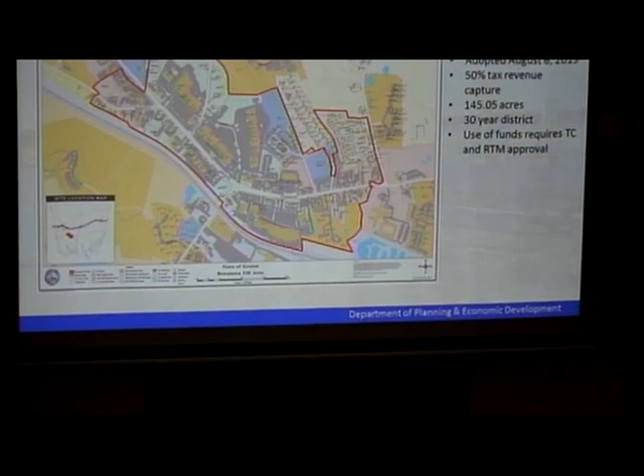So I just wanted to give a very brief overview of the Route 1 district plan that was adopted just last month, actually fully implemented in August. Again, the 50% recapture, it's just a little over 145 acres, and consistent with the policy both for the town and the city, we're looking at a 30-year TIF.

And in the town, any funding requirements for projects require approval of both the town council and the RTM. And again, just some of the general guidance and implementation of what we're looking for. These are guidelines that are within the TIF master plans themselves. If you look at both the city master plan as well as the town, we're looking for a lot of these same types of qualities. How can we improve the quality of life, sense of place, and get reinvestment back into these critical districts?

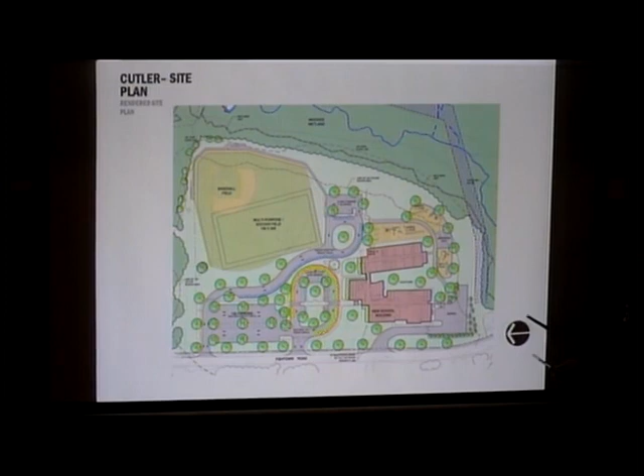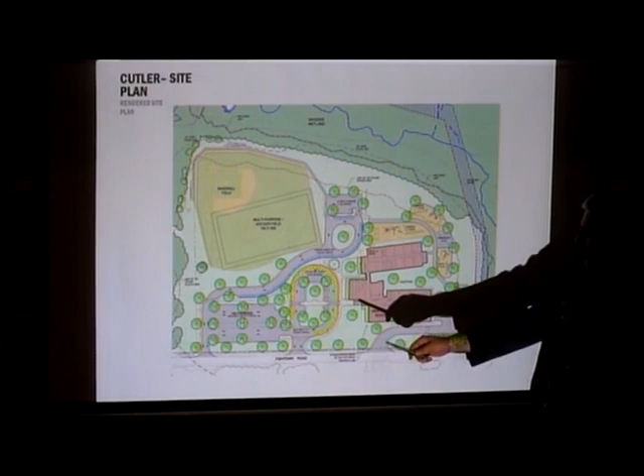Where Cutler is concerned, we're entering about midpoint of the site for our main entrance into the property, which will bring us into the bus loop. Students will enter at this area of the building near the administrative office. That'll also be the main visitor entrance to the school, where we'll have a security checkpoint at the front office area before anyone passes into other areas of the school.

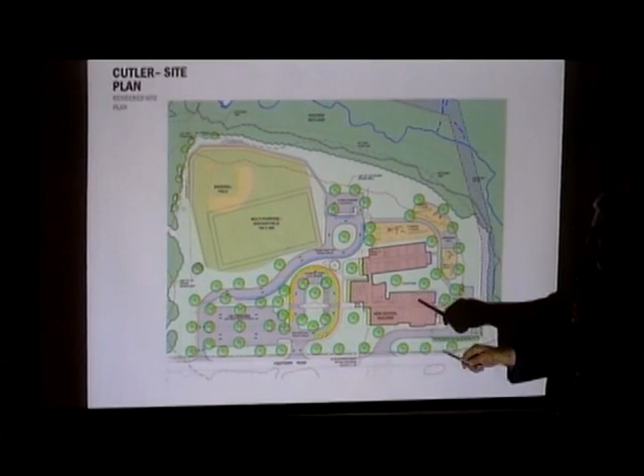The way the plans are broken up, the more public areas are concentrated, and then the academic areas are in a separate wing, which can be secured at night for segregating those academic spaces away from public traffic.

Specific to Cutler, as I mentioned, we have the bus loop. We'll have some visitor parking in this island in the center. And then the buses will pass back out onto Fishtown. Parent drop-off traffic will enter a separate entrance here and loop through.

We have this long drive which will allow curbside drop-off, and perhaps even more logistically challenging is afternoon pickup, where parents will be able to queue. Our goal is to get basically everybody off the road that we possibly can in order to queue up there.

There's also a separate parking area here for the pre-K and K parking, where parents walk their children into the schools and they're accepted by the teachers. They'll be able to approach this way through the walk here, and there will be a minor entrance here that will be used just for that pre-K population. Everyone else will be required to enter at the main area. So your parent drop-off and your pre-K traffic will come here.

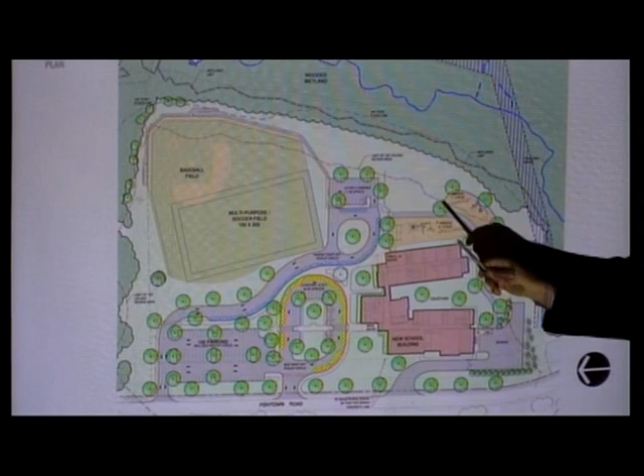As far as the site development is concerned, we're using pretty much every inch of the space. We were given an accommodation by the wetlands folks that any area within this dotted red line, the 100-foot upland review area for the wetlands, could be developed as long as we didn't expand the cleared portion of the site beyond what was already cleared. So we could do development such as the playscapes and ball fields within that 100-foot protected area. We've respected that existing clearing limit line, and as such we have what you see for available area for development.

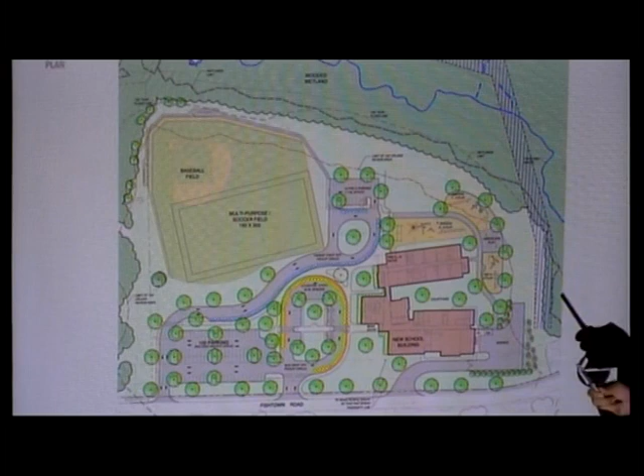We do actually have more developed area as far as hardscape than the existing building, and although that might sound like it's not ideal, it's actually functionally very good in that we're able to separate the bus and parent traffic and have them use two separate intersections to the main road, so we can keep those traffic flows as separated as possible and keep them safe.

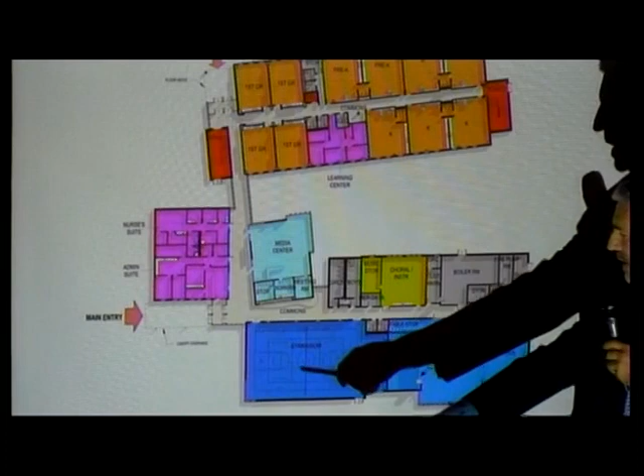As I mentioned, the big box spaces are located in the wing closest to the street: boiler and back of house spaces, music areas, gym, and the dining room or cafeteria with a performance area. This will be an at-floor-level performance area. We're not putting in a raised platform, which adds more flexibility instead of building a stage, the same technique we employed at the middle school. So if they need a raised area, they can use platform risers, but for accessibility and flexibility of use, if they need overflow for classroom space, it's all at one level. Then the kitchen and service area is off to the side.

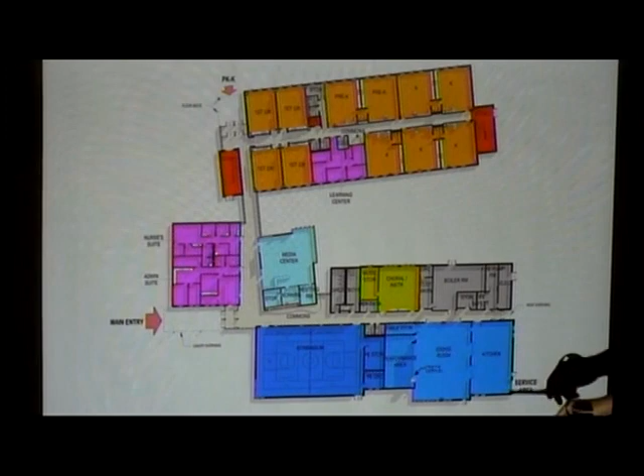The media center in both cases is central to the building. A wider circulation space called the Commons is provided with a little gathering bench. The main office and administrative nurses suite will be right at the entrance. A visitor comes to the building, they'll first get buzzed into this vestibule. These doors will continue to be locked. They come in and sign in at the office and then are allowed passage into the building itself.

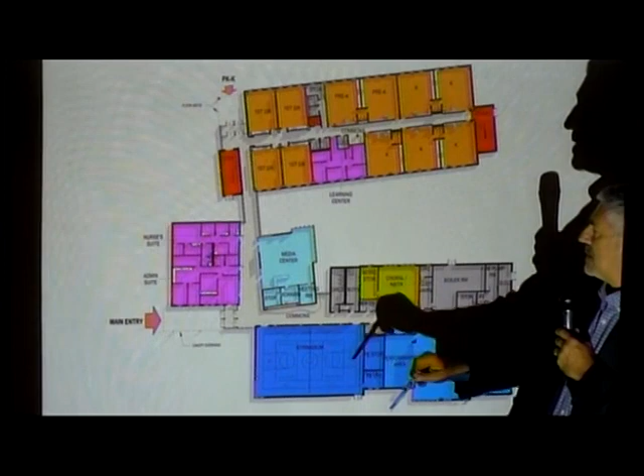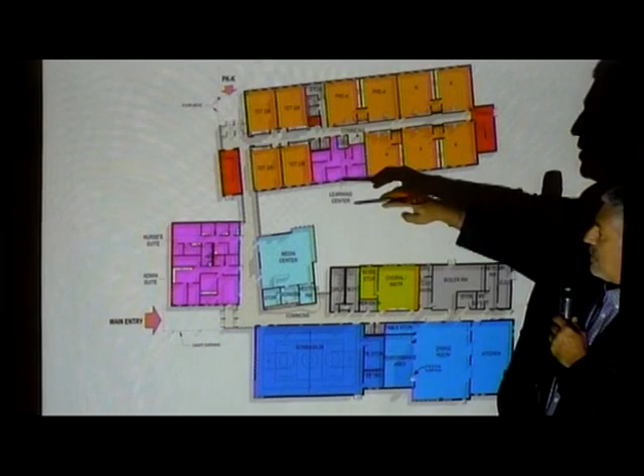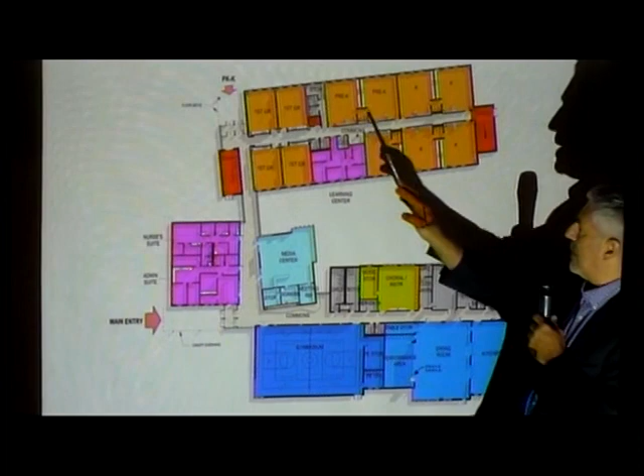At Cutler we have an essentially flat site, so you'll have an academic wing that appears three stories, but we're locating that as far from the street as possible so it'll be less imposing to the neighborhood. First grade, pre-K, and kindergarten will be on the ground floor level, then we proceed upstairs to two more academic floors. Looking from basically the parking bus loop area at the building, you can see the massing of the big box spaces is large, but still not as large as if we had put the academic three-story at the street. So our setbacks are at or beyond the minimums required by zoning, and we're trying to keep the highest portions as far away as possible.

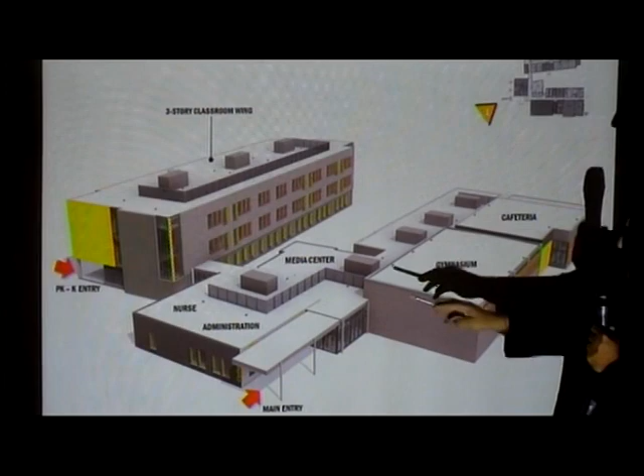There are roof areas that have the potential for solar installations, and that's being researched on all three schools. Any mechanical equipment on the roof that could be visible from the street will be provided with screening.

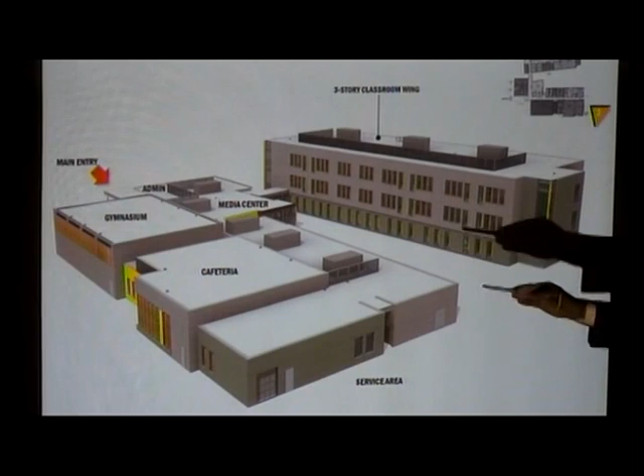Here's a look from the opposite corner from the service area as you come around the curve on Fishtown. You can see that there's not an official courtyard, but there is daylight between the wings so that these classroom spaces will have full access to daylight.

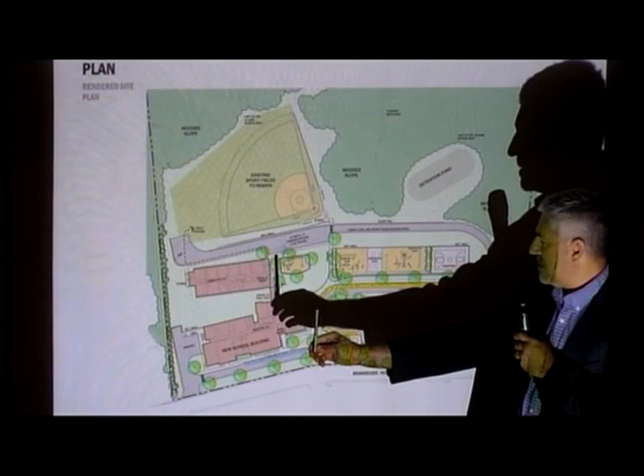At Westside we have an existing building that is not only in this area of the site, but actually approaches and nearly touches this wing of the new building. So our plan for construction here will be to start on the academic building, put in the foundations and begin raising the steel there first, then come back through the public wing and work this way. Our expectation is that we will be out of the school season by the time we get to constructing the office block.

Another obvious question will be, what do we do about parking? There's some parking in the front of Westside, but there's also a large lot in this area. The construction manager, O&G Industries, has worked out a logistics plan that says for those early stages when we're doing predominantly work back here, there will be a small reduction in teacher parking of, I believe, something in the neighborhood of 14 to 16 spaces. Depending on how the winter weather treats us and how early our spring actually comes to Groton next year, we'll see how much progress we can make until school is out.

There's another potential increment to take another slug of that parking and occupy it for construction activities. In the event that's required, there's a memorandum of understanding being reviewed by the attorneys right now between the town and Pfizer to use their visitors lot as overflow parking. If that becomes necessary, there will be a shuttle bus that runs back and forth for staff purposes. We would still keep visitor traffic on site.

Again, in the interest of safety and circulation, we've created 2 separate entry points for parents and buses. The only dual use here is that during drop-off, pre-K and kindergarten parents will drive around to the back, and there's a separate lot, similar to Cutler, a dedicated lot for them to park and walk their students into the academic wing. So those will be the only cars that need to drive through that loop, which is the same entry that the buses will use, entry and exit point.

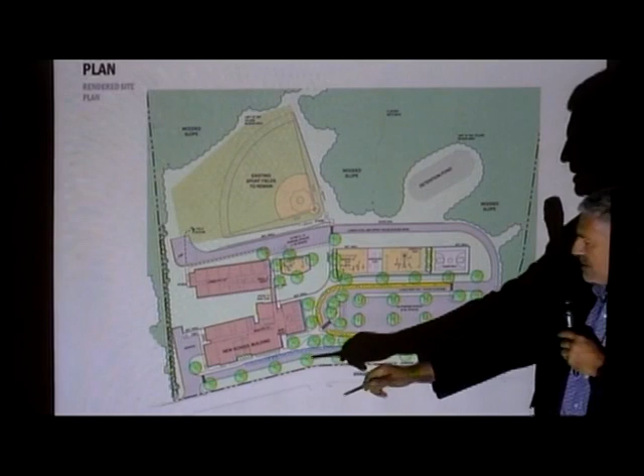As you're aware, we have a significant grade change from street level to playing field level. That will cause the academic building to seem much shorter than it really is. In fact, there's about a 6-foot change between the roadway here and the driveway right at the building. So even the big box spaces will be reduced in height effectively because of the slope of the land.

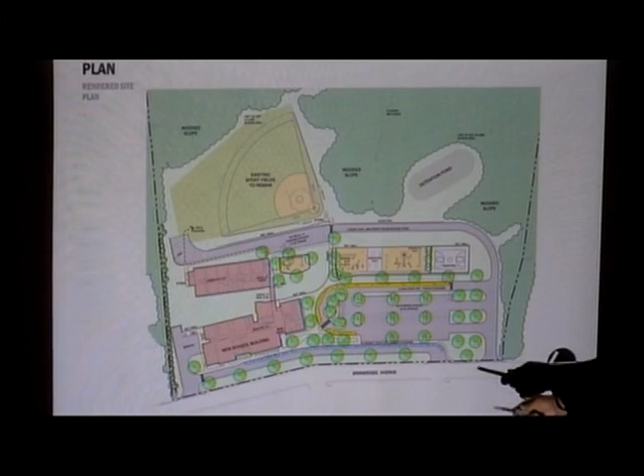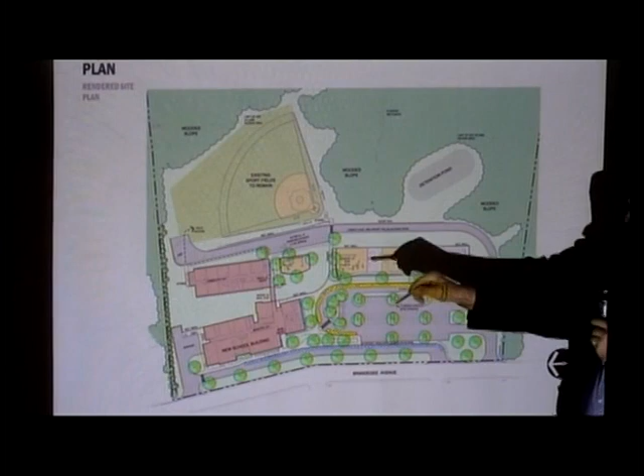By flattening things out in order to build, we've got a considerable amount of earth to move, and it's been calculated that it's obviously more effective if we can move the soil on site rather than carting it away. So we will be depositing that soil here in the field area, bringing that elevation up, which will effectively reduce the distance vertically that you travel from this area down to the fields, which is beneficial for our handicap circulation, et cetera. So we're saving money and making it more convenient at the same time.

The only area of new clearing that will happen on this site is in this area. This dotted line curving around is our 200-foot upland review from the wetland area. And we have just a detention pond to take our stormwater that will be intruding into that wooded area. Might be a little trimming along the edges, but generally speaking, we're respecting the existing boundaries to the greatest extent.

Similar in floor plan layout, we have the administrative block. We also have a health clinic in this area, and our faculty dining is located in this block. So this area is a little larger in square footage than what we saw at Cutler.

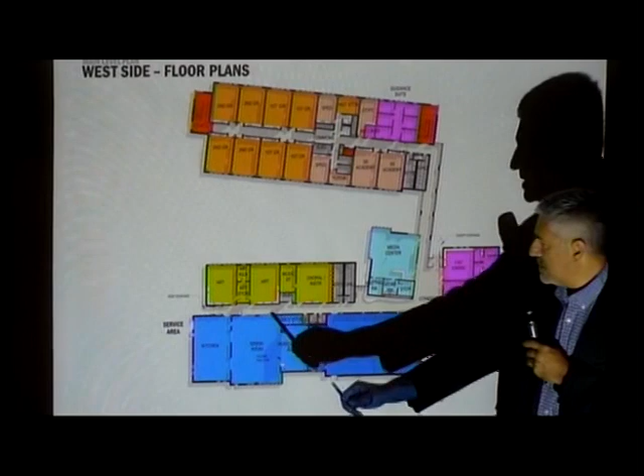Similar idea of visitor entry: come into a locked vestibule, sign in at the office, and then be given access into the building proper. The big box spaces, art and music on the first floor here, media center central, with again that commons and multi-use seating area, circulation area here.

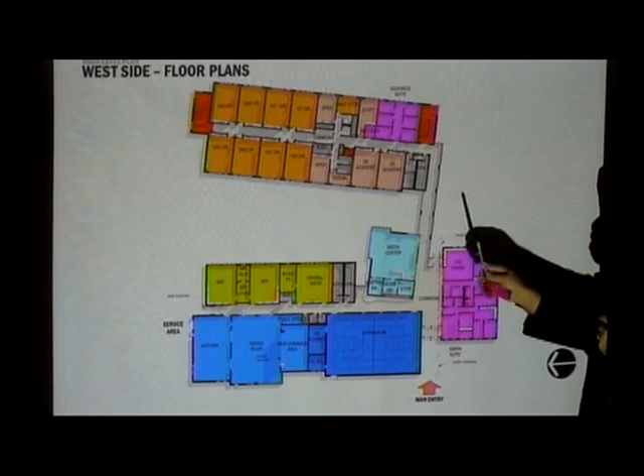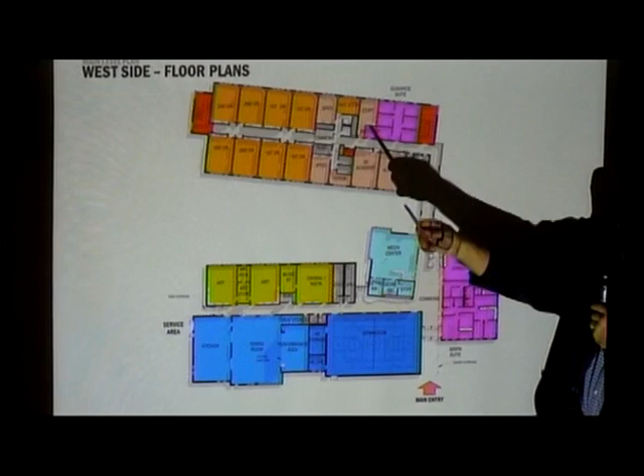Due to the grade ranges and the need to have certain age students at grade, some of those students, the first graders, will have, since we effectively have 2 grade levels, one at the field level, one at the main entry level, we can accommodate the need for an at-grade exit through here, with obviously stairs and emergency escapes at both ends. Again, we'll have one level below this, which is the pre-K and some support space, and then up on the topmost layer of the academic building, the grades above second grade, so 3rd, 4th, and 5th, will all be concentrated upstairs. There are special ed and tutor spaces and other resources interspersed within all 3 of the academic levels in order to reduce student circulation to get back and forth to their support services.

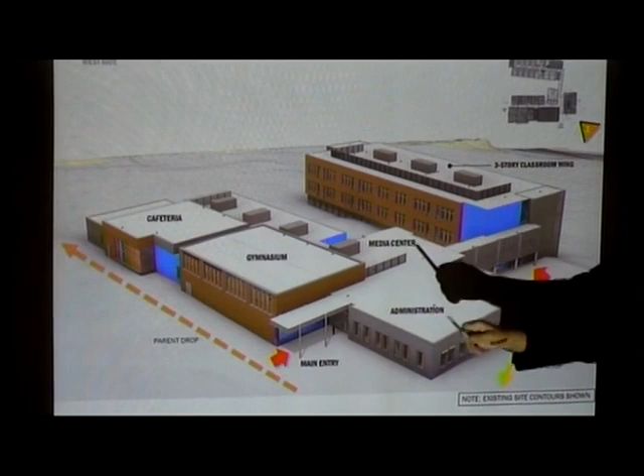This doesn't really depict the grade changes as effectively as we'd like to illustrate, but you can see this level of classrooms is below the office and entry level, giving the appearance from the street of only a 2-story building. Again, mechanical equipment is nestled behind the big box spaces to the extent we can, screening them from the street with rooftop screening. There are still areas on these roofs that could be used for solar installations.

I'd like to stress that the designs were developed with the architects keeping in mind that people actually have to teach in these schools. So there were an awful lot of administrators, teachers, special ed people and others who sat and put together all of the square footage, figured out what they were going to need, and how the adjacencies were going to work together. This wasn't designed just by a bunch of architects. Many people who are going to be in these schools have had a direct hand in defining how they're going to work.

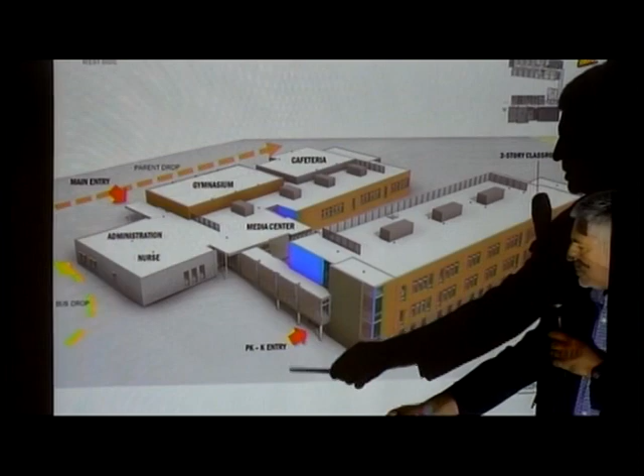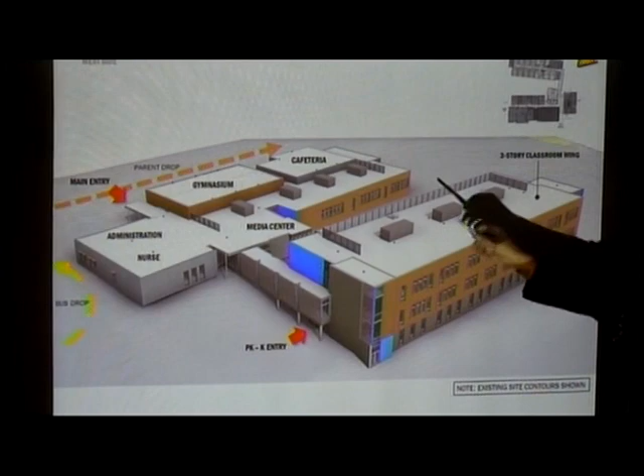Here's a view coming from the field area. You see the lower entry, the pre-K and K entry, is below. This is actually more of a bridge than a corridor, as the grade drops down and exposes that lower level. What you don't see is the dedicated parking area for that drop-off function. But again, similar to what we saw at Cutler, the 3 stories are married to the high 1-story spaces that'll be closer to the street.

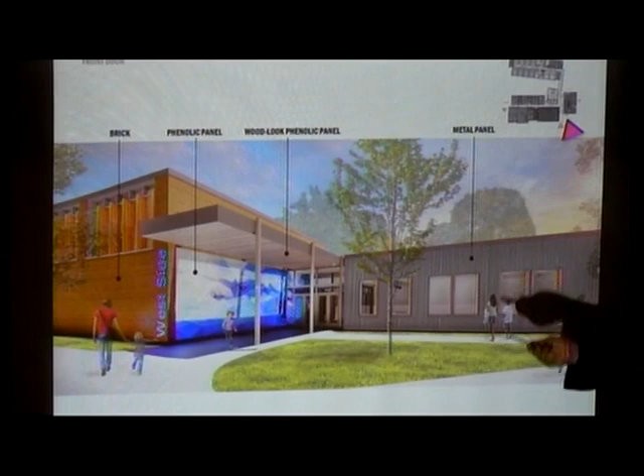Here are some images that are similar for both, though not the same, but it would be kind of redundant to show you almost identical versions of each. The architects are looking at a variety of exterior finishes, including brick, some composite materials that would give a smoother texture, and some metal panel of some sort. We do have that type of mix of materials on the middle school to change up the palette and add some interest to the building. Color schemes and whatnot are still being researched with the building committee, so this is all considered tentative. But there will be a variety of spaces.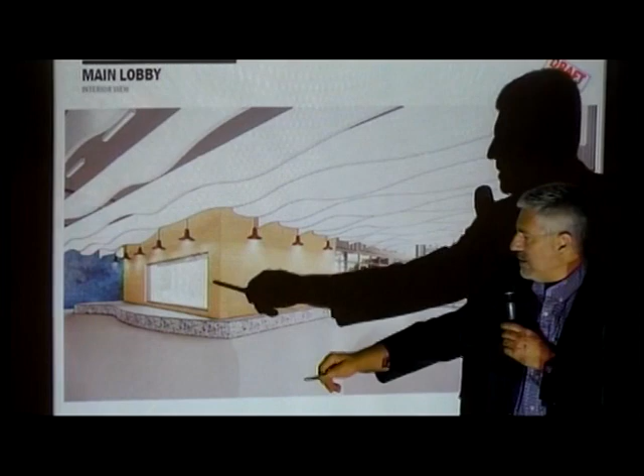As you see from the academic or administrative area, it's a 1-story space, as is the cafeteria and gym, but the scales are such that we don't need the space for the academics. So again, we try to step that scale of the building down to make it more human scale at the point of entrance. This is a typical main lobby, commons area. There will be some display areas provided, and a bench for gathering. This is across the hallway from the gymnasium. Here, the media center will be just down the hall from the main entrance, and these window walls represent the main office. This is at West Side, the exit that gets you down off to those playscapes that are at parking lot level.

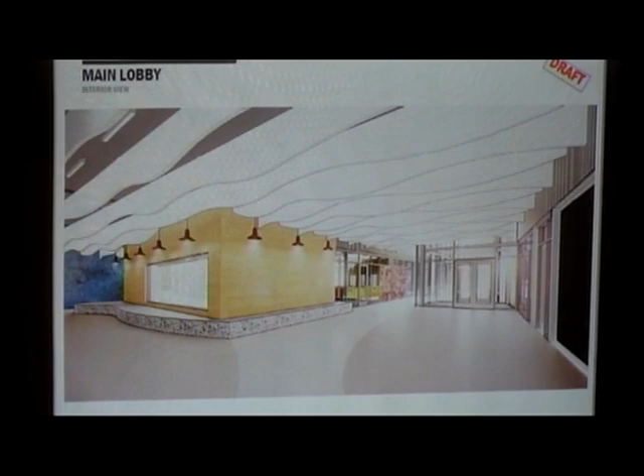Instead of a flat acoustical ceiling, it's open to the structure, but there are acoustical baffles hung, which will add some visual excitement to the ceiling without just being a sea of flat tile. But it will have acoustical properties. A similar type of material is being used in the media center, with different types of lighting.

Last week, at a special building committee meeting, the architects began discussing the palette of materials and themes, as far as colors that will differentiate the schools. As you saw on the floor plans, the schools are not identical, but they're equitable, and we'll try to keep similar qualities of materials while breaking up the color schemes and approaches so that each school has its own identity.

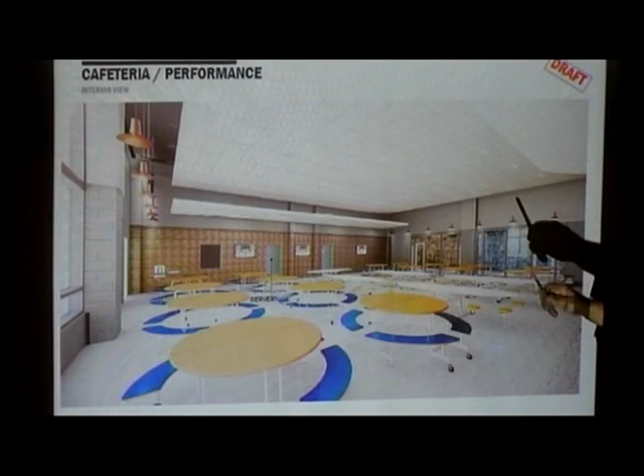One large area that will have the flatter ceiling is the cafeteria area. This is looking from the corner. There's that non-stage performance area that will be off to one side, so it really functions as a cafetorium. There will be chair and table storage off to the side so that the eating tables can be removed to allow an assembly or a performance to happen there. With a flatter ceiling that's held off the walls to float in the middle of the room, and an acoustic baffle at the rear near the servery, the architects are paying attention to the acoustics in that space to make it appropriate for both cafeteria use and performance.

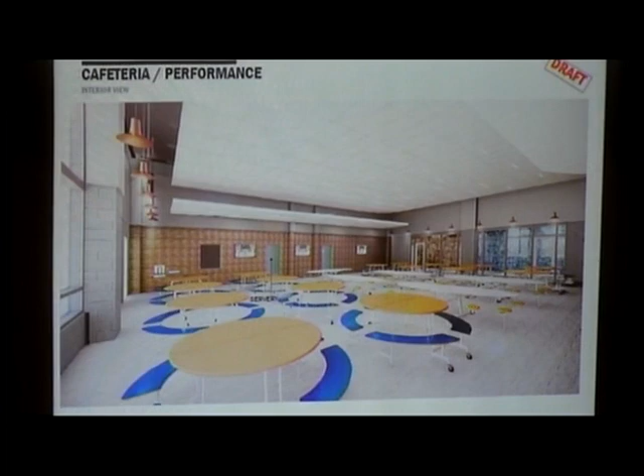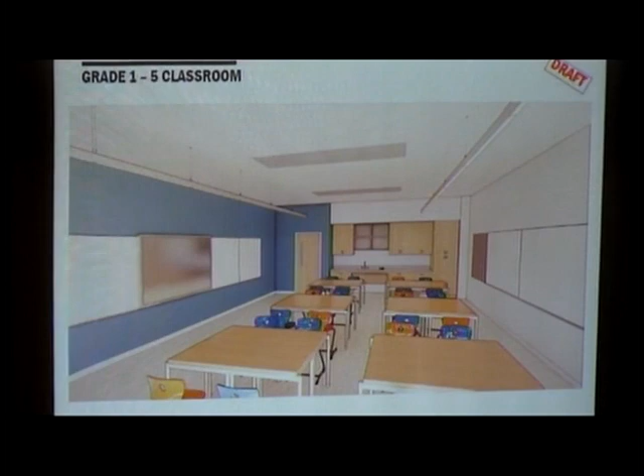Here's a comparison of the two schools, West Side versus Cutler. You can see many of the same types of spaces grouped in similar fashions. They are not directly mirror images of each other, but they are striving toward as much similarity from a functional standpoint as the sites would permit.

Are there any questions on the elementary school?

Could you go back to the illustration that shows the ground? Councilor Zeperi, can you see if that microphone is on, please? The light's on. It's red. Try this one. Lights on, but no results. Correct — they said that about me for a long time. We have Councilor Zeperi, and then Councilor Franco wishes to speak.

On the ground site where you show the three buildings, the classroom building is at a lower level, and there's a bridge going across — well, there's another one. The one thing I'm concerned about is that school building being on the lowest land level of the site. I'm concerned about surface water — will it all accumulate? Is that building going to actually be a lake?

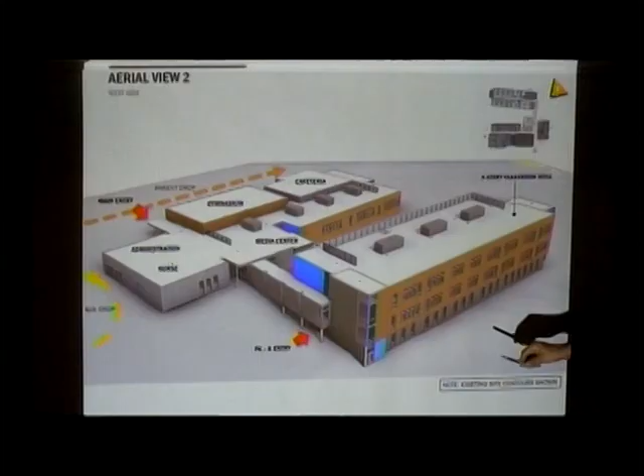The grade actually continues down towards the fields, and then past the fields goes down the hill into the wetland. So we are partly down the hill.

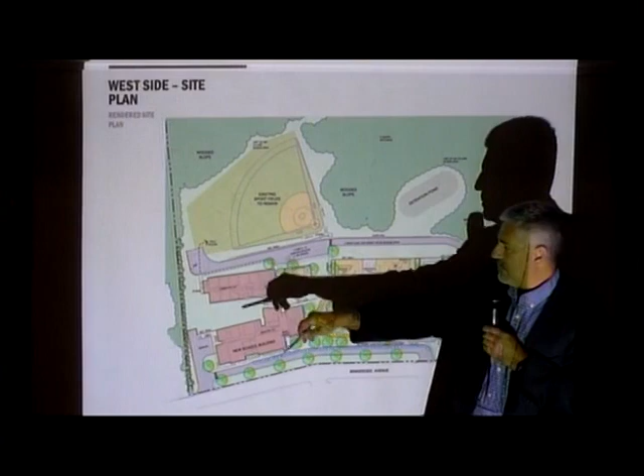I thought you had told us that you were raising the level of the field so it would be easier for people to get to. Yes, there is still a fairly significant grade change from this level down to the field, but now it's four feet less than it was before, once we take all our fill from this area and deposit it here.

Councilor Ortiz: Hi, I have two questions. On the slide with the classroom, where are the windows? Actually, the camera is in the window in this orientation.

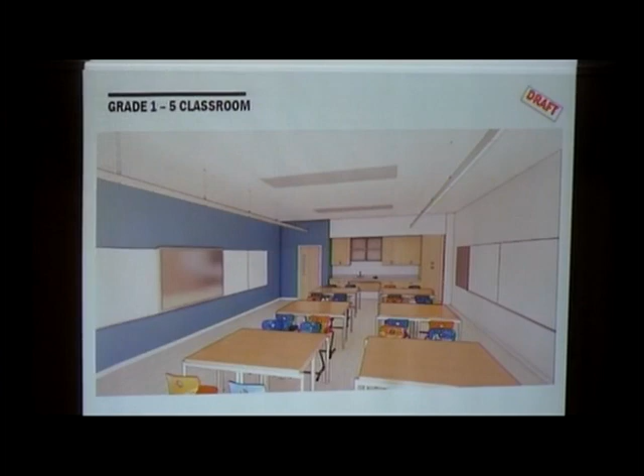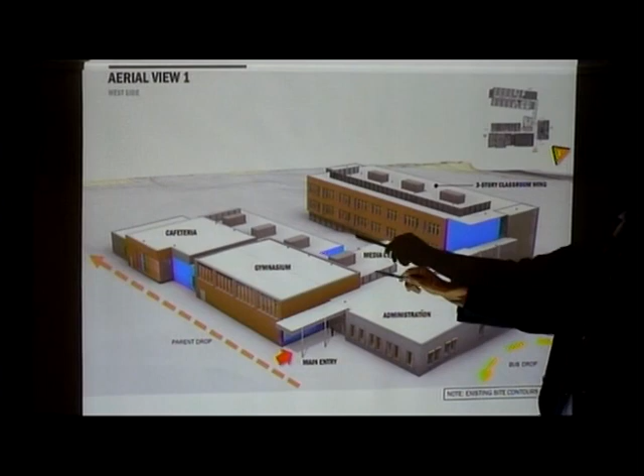Every classroom has both direct and indirect lighting, and if you look at the way the buildings have been stacked and organized, they've been designed specifically so that light reaches all of them — even the pre-K classrooms at the bottom will have daylight. This portion of the lower level at Westside is our support space, the boiler room, etc., hidden by the hill. Then as we get toward the more open area of the court between the wings, the grade drops sufficiently so that all the classrooms have daylight.

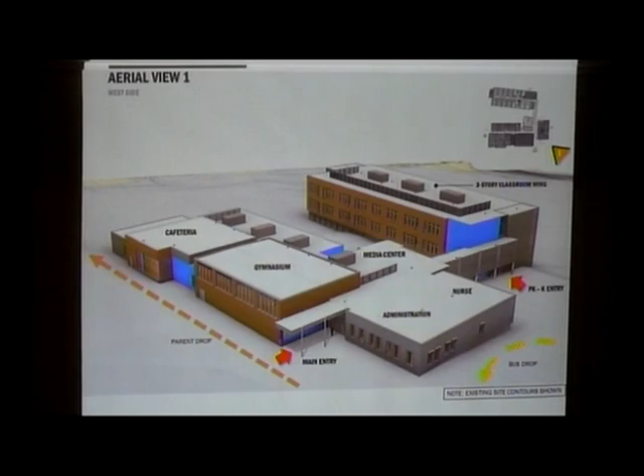Special ed rooms, classrooms — are you going to build to cater to special ed, physically and otherwise?

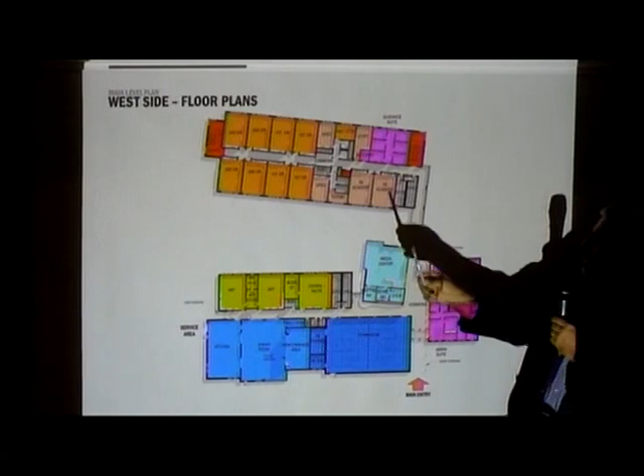The two schools have slightly different programs for special ed. They have different names and different functions, but the space allocation is very similar in terms of square footage. The academy spaces here at Westside support special ed plus special ed resource areas. This is just showing one floor, but there are other resources scattered throughout the building.

This was one of the things that was very carefully looked at — the special ed staff who actually teach and work with these students had input, and they let us know how much space they needed, who they had, and what kind of uses needed to be adjacent to each other. So you'll see there's the OT-PT space here that opens up into a commons.

And Jack can go further. And then tutoring spaces, again, the special ed resource rooms. And again, this is just represented one floor of Westside.

Thank you. You're welcome. Councilor Franco: I have a lot of questions. Is this on? Okay. So how many children will be in each school? That's up to the Board of Ed. What does that design hold?

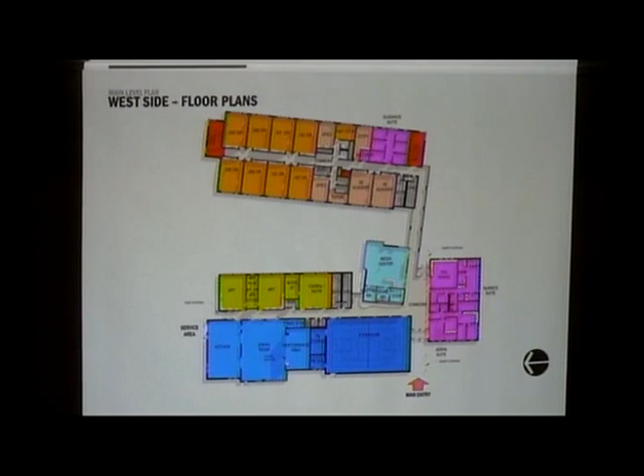The design capacity as requested when the town sought the grants was 604 students per building. Is there room for expansion if needed, if there was a big boom? There is room within the existing allocation of classrooms to accept more students in the existing footprint. And yes, given the constraints of the site, the possibilities for throwing an addition on have been discussed, although configuration-wise it would be a little difficult because of our constraints with the wetlands and setback lines. So there's a potential, but I can't say we're going to add a dozen classrooms to each. And that's on both buildings?

Yes, both. We've discussed that with the architects on both buildings. I can't say that we have a clear, put-them-here footprint determined, but we know that within the number of teaching spaces we have, and by allocating those spaces and perhaps adjusting the number of students per class, there is an opportunity to absorb a certain percentage of growth even within the existing footprint.

Okay, so these are renderings. How locked in are they? How locked in are these designs? The floor plans are essentially set. We are now in the process of creating construction documents. We've gone through schematic design and design development.

Those have been accepted by the building committee and reviewed by the board. It conforms with the ed specs and has received everyone's approval so we can proceed into the construction documents phase, which will wrap up this fall, but I believe the deadline is the 9th. Next week is our 50% point for checking the construction documents and sending them out to the estimators again. So CDs are just about halfway done at this point with a goal of wrapping up by November.

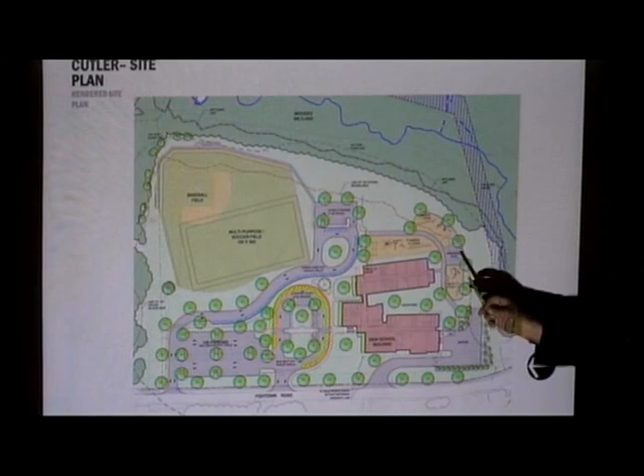So can you tell me what the outdoor athletic areas are? We have paved play, three age-appropriate playscapes located on the site, a multi-purpose field, and a baseball field that would be provided at Cutler. Is there a basketball court? There is not at this time, no.

So previously at Cutler there were six areas: a tennis court, a basketball court, a general field, a soccer field, a softball field, and a baseball field. So those were six areas for athletics. And what I'm seeing here basically comes down to about three areas. I'm wondering why we're losing so much, and then there's no ability to even expand the school if there's growth.

The projects are elementary schools, which have a much different program than the middle schools that have until now occupied the sites. With research, the middle schools did not have things such as the paved play and the playscapes, which you can see chew up fairly measurable square footage on site. We also have the balance with the state grant and the granting agency that is looking at what does an elementary school need, what does the ed spec request as far as features to support the elementary school. And beyond that, features, if we could fit them, would not be eligible for state reimbursement.

Due to the fact that we did not have separate traffic patterns for buses and parents, as I discussed earlier, we are actually creating more roadway surface in these layouts than we had previously, but it's being done for a programmatic function, which is to separate those traffic patterns. So that takes precedent - what are the features required to support an elementary function - and those became priorities. So if there was square footage available for something beyond what an elementary school requires, those would be features we'd essentially have to come back to the council about, to ask if we can spend money on features outside of the ed spec that are not education specific. So that was what has been driving each of these designs.

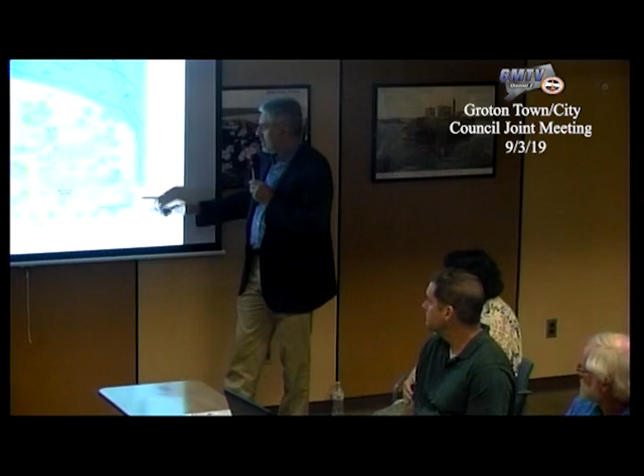Due to the proximity to the curve in the road, we've had to push even the service entrance further down, just from a traffic management standpoint and sight lines for entering and exiting. So to have put a heavily used parent drop-off lane in the front here would have been a traffic safety issue. But those were all researched early in the design process.

Well, maybe it's just coming here at a late date that nothing can be changed, and you're sort of stuck with what the rendering is now, but maybe the school could have gone on the other side, all the way to the other side.

Can't do that if we're building before the school ends. Oh, that's right. Sorry about that.

That has driven the schedule, even though it provides us the advantage of completing the program a year ahead of schedule, saving the cost escalation of a year, and allowing the redistricting plan to happen a year in advance, reaping those savings for the town. That has been a design constraint, surely.

Also, inside the gymnasiums, is there room for parents to sit in chairs around the edges, or are there grandstands? There are no grandstands. There is some limited perimeter area for seating, but these are not competition venues. These are elementary school gyms that were actually sized at the middle school size, so we've upsized them and prioritized square footage to make them larger than typically would be programmed into an elementary school. The two previously built new elementary schools, Northeast and Kolnaski, are not regulation-sized gyms either, and parents cannot sit around the edges.

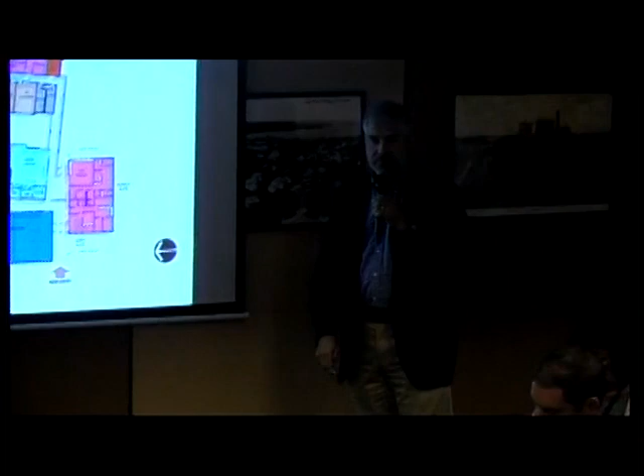Do you have further questions? Again, as mentioned before, the actual square footage of these two gymnasiums is based on a middle school sized gym, not an elementary school sized gym. So we're already upsizing the gym from what the space standard would typically expect in an elementary environment. We pushed the envelope as far as we could while staying within the overall square footage allocation that the state allows.

I'm not sure if I actually heard the answer though. Will parents be able to sit around the edges? As Bob mentioned, there are margins around the court that could be used for seating, but there are no grandstands. Is the margin the same as, say, the Kolnaski School? No, it'll be more like what you see at Westside and Cutler currently. All right.

Just a few more questions. So when you're building the finishing and the facade, is there nothing that's looking as though it's going to need major maintenance long term, like I believe Northeast Academy had?

No, exposed wood beams, if that's what you're thinking about. Yes. Okay, thank you. And the full security—

It's at the best practices now, right, that's going into these schools' security systems? Yes, all three projects are required to respond to the school safety infrastructure guidelines of the state and conform with the safety plan developed by the Board of Ed. There's a set of guidelines the state has published, but each board statewide picks and chooses how they're going to meet those goals and comes up with their plan, which they articulate back through the Office of Emergency Management and put on record with the state. So the district has done that, and the designers have been following the decisions the town and Board of Ed have made for all three schools.

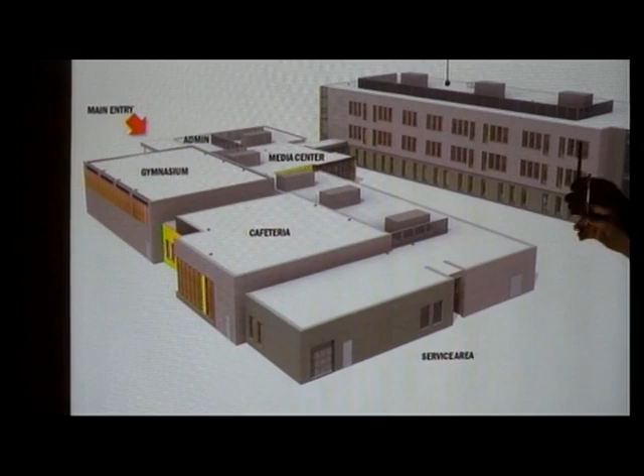And the windows, I had seen a picture—are they narrow windows, or do they have some kind of wood in the middle to shield sunlight? Where we have exposures that would get sun glare from the east and west, there are vertical shade fins to interrupt that so it softens the light and doesn't glare directly into the classrooms. So those are solar control fins—they are, as you see, these vertical elements between the windows.

All right, thank you, I'm all set now. Sorry to ask so many questions. No, it's great.

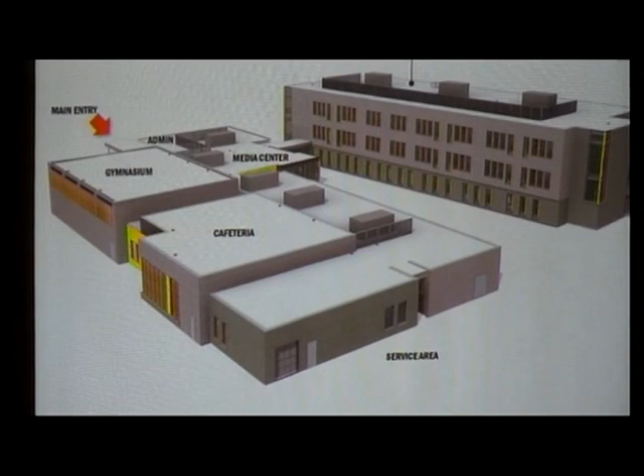We have Councilor Bumgardner. The number of meetings we've had with nobody at them—it's fun to have people that actually want to know. Oh, that's not what you said the other night when like 20 of us showed up. So we have Councilor Bumgardner, then Councilor Heed.

What sources of energy will these buildings derive the majority of their power from? I understand the Westside Middle School building, which will ultimately become the elementary school, can accommodate solar panels. All three buildings have the ability to accommodate some solar panels, and there's additional research being done on how much and where. It's not a significant percentage of the power usage from an electrical standpoint, but each building has the potential of contributing something through PV panels. The primary sources of energy are utility electric, and the heating systems will be powered by natural gas.

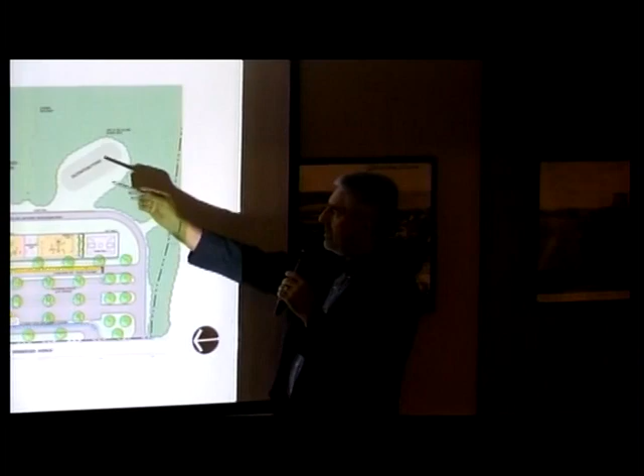And in the case of the Westside Elementary School building, what sensitivities were given to Baker's Cove? Obviously there's a retention pond just behind the school, but in the long term there's a plan to extend a walkway commencing at Thomas Road and ending on Poquonnock Road, which could also open opportunities for educational exploration for elementary school children in the future. Plans for hiking trails have not been something we've been made aware of. But other than clearing the site large enough to accommodate the required detention pond, we're not doing any other disruption to the site to change it from its existing state.

Lastly, I understand these school projects do not currently have a project labor agreement, so has there been any consideration from the building school committee and Arcadis toward ensuring local people will be hired on these contracts when they go out to bid? The town council has decided to implement certain employment requirements for resident labor, minority labor, women, and military veterans, and each construction project will be measured against those goals. And that's already in process at the middle school. Thank you, Councilor Ortiz.

Hi. Concerning the security of entrance in these two schools, what do we have in place?

From a visitor security standpoint, we come into a locked vestibule area. They'll need to get buzzed in to the outside doors, which will then let them be buzzed in to the main office area. Once they check in and are badged, then they'll be allowed to pass into the school itself.

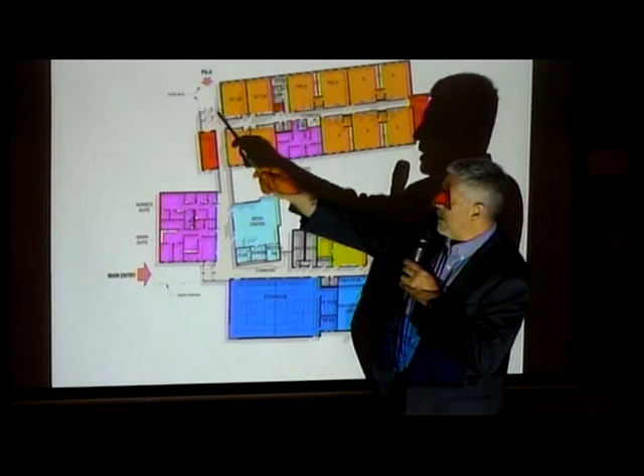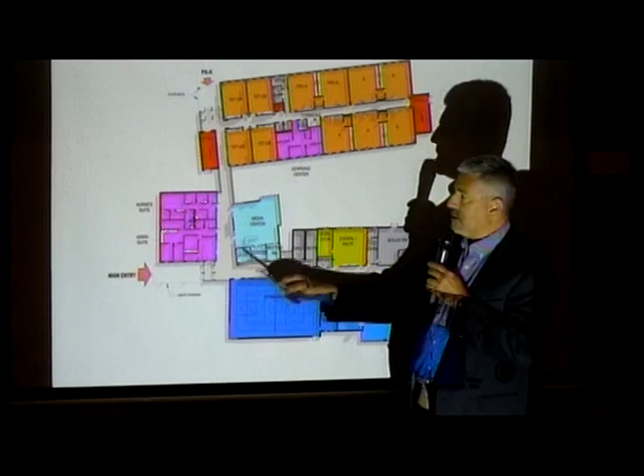All of the other doors, after arrival time, all entrances will be locked. At arrival time, only these two areas, which will be monitored, will be open. So all your peripheral emergency exits will be locked at all times. There'll be some provisions to buzz in for deliveries and the like at the service area.

So each of the buildings is a secure building, and there is that checkpoint Charlie at the front office for all visitors. Beyond that, the other features that the Board of Ed has identified, which I can't articulate off the top of my head, but their entire security plan as to how the district wants the building to run has been provided to the architects and also is shared with the state as we seek our incremental approvals.

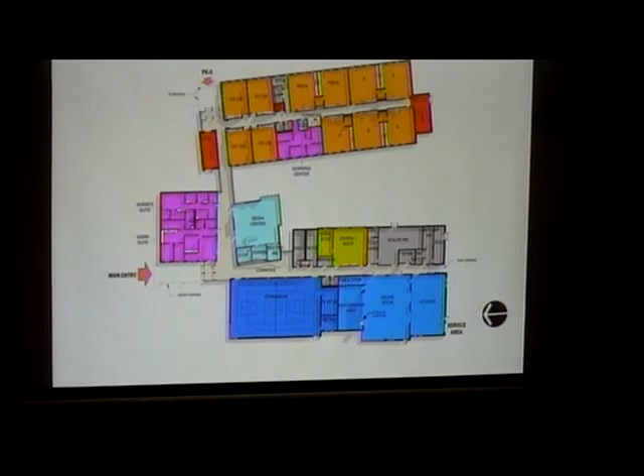We can talk about the basic security, which he did. We're not going to get into the details of specific security requirements that come out of the plan that the Board of Education delineates, and that's a matter of safety for the kids.

Yes. I also see that we're over our time allotment for the next meeting to start, so if I may proceed on to a quick update on the middle school. We had one more question, please. Okay, Councilor Heed? Councilor Ortiz got my question. Okay, great, thank you.

As Bob mentioned, we recently had the topping off party. The last piece of steel was raised at the middle school on Friday. Just to recap, and there has been some discussion in the community that tells me that there's still some confusion as to how our points of access work for the middle school.

We have an easement from the state of Connecticut to connect to our driveway, which will lead up the hill, and to an area at the lower level of the school, which will allow parent drop-off at the curb, and then they can exit out to Route 1.

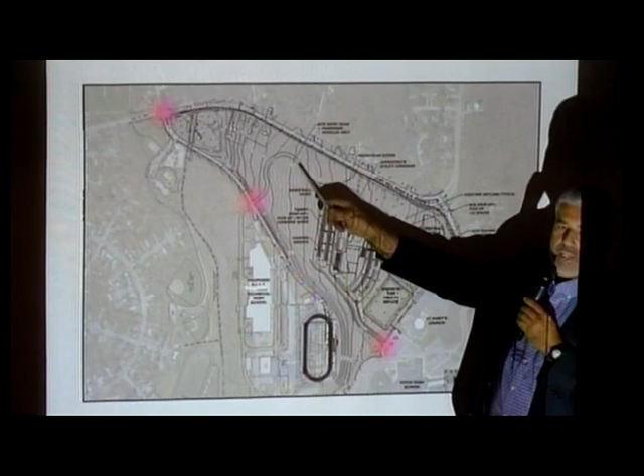You may have noticed some construction happening down here near the park. That will be the installation of our sanitary sewer that will then continue up Route 1 and then cross into the site at a point, a third or halfway up the hill. So there's a somewhat larger break in the trees down here, but that's just to allow that construction to happen. Then there will be new trees installed later in the project to add some screening from the street.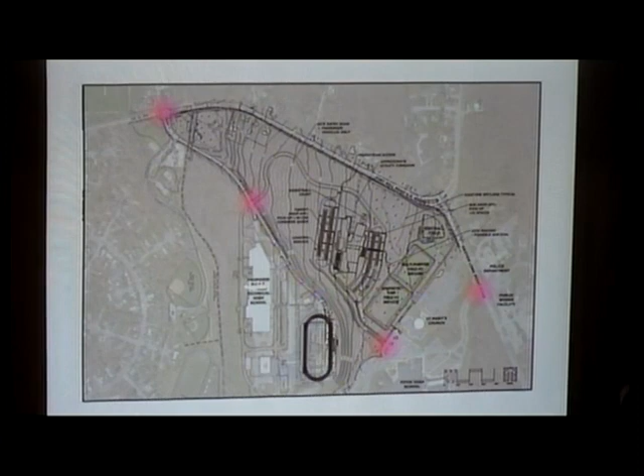I'd like to note at the top of the drawing here on the right, you're picking up the softball field, a multi-purpose field, and what we're thinking is going to end up being a synthetic turf field as well. So those are in addition to what's there already. We're more than thinking, we already bought it.

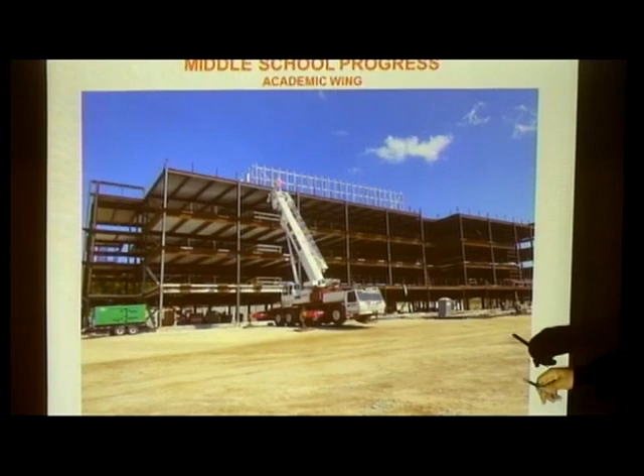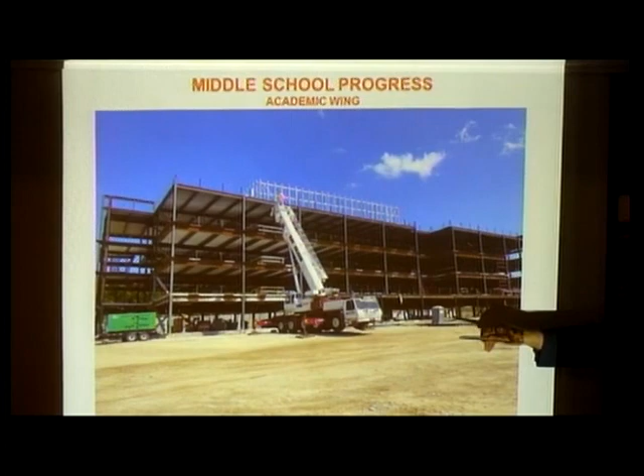Here are a few photographs from around the project. This is from that lower level, near where I said the parent drop-off will be at the lower level of the site. At the grade level of the academic building, we have four floors of academics here at the middle school, and the main entrance and main office areas are at that lower level, so our visitor parking will be down at that parking area as well.

As we mentioned, up at the upper level, because we have two grade floors here, again, the bottom of the academic wing, and up at the gym and library wing as well, there'll be additional parking there for events as well as teacher parking.

This is a shot looking basically with your back to El Grasso, looking across what will someday be a parking lot at the academic building. You can see the steel is up. We have slabs poured on all floors, and we've got our roof screening for our mechanical equipment that's been framed.

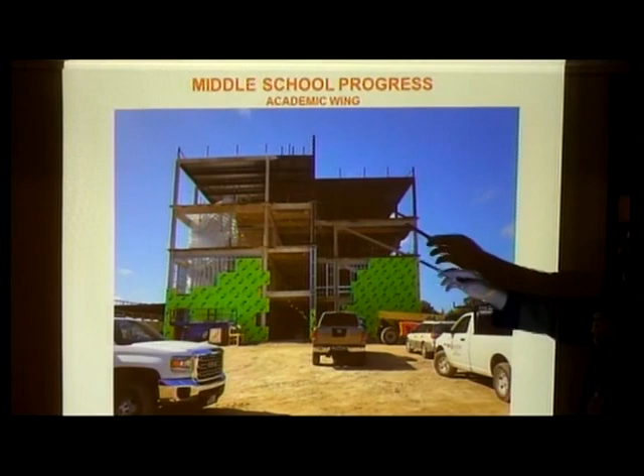Looking from the end of the academic building, this piece faces Route 1. You can see the stud framing to enclose the exterior is proceeding. We've got spray-on fireproofing to protect our steel proceeding, and we're already starting to sheathe the building.

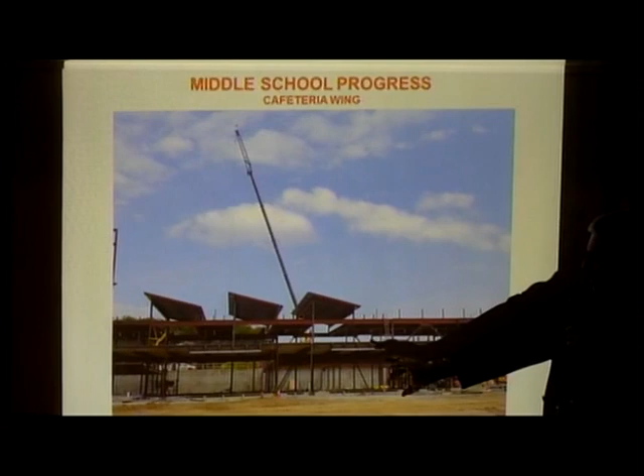This is a view on that lower level again, to the right of where the other picture was taken. This element will become our art classrooms in the front on this lower story, and the higher framed area is our cafeteria.

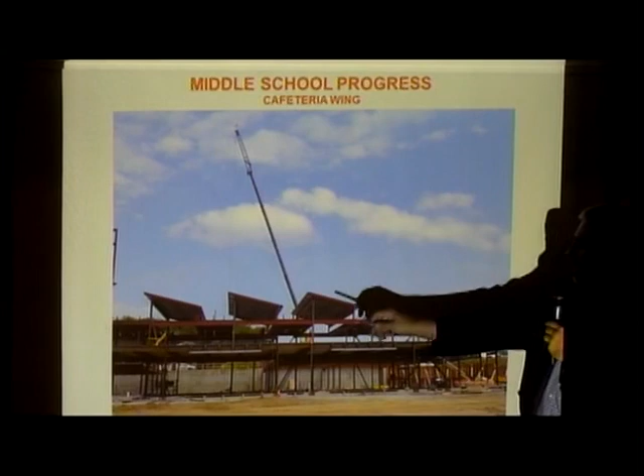These monitor roofs on the cafeteria have the opening pointing north, so we'll have some north light coming into the cafeteria areas, and those areas are also some of the square footage of roof able to accommodate solar panels.

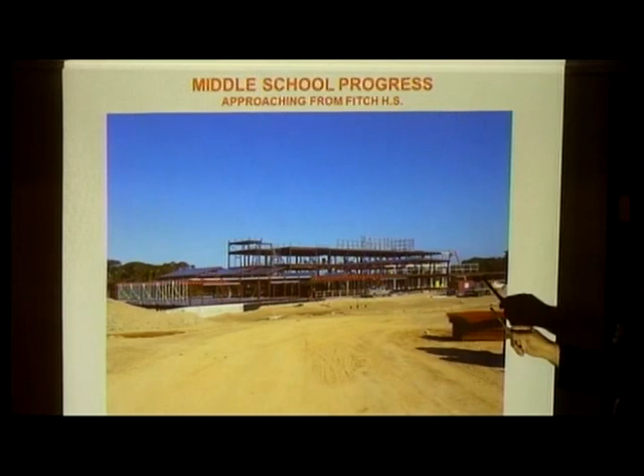The gym framing was just starting to go up when this picture was taken. As you know from last Friday's ceremony, that has extended upwards and the last steel has been installed.

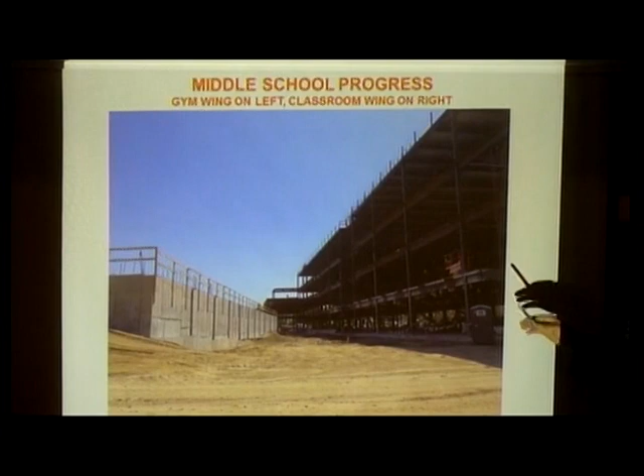This picture shows the area between the two wings of the building, where we have the academic building on the right, and what is now a fully framed gymnasium structure occurring to our left.

Progress is on schedule. I dare say maybe just a smidge ahead of schedule, but we don't want to jinx anything yet. We're still working diligently at a six-day-a-week pace that we bought. All trades are working six days a week in order to meet our obligation of students in seats for the fall 2020 school year. Are there any questions about the middle school?

Councilor Franco had one more question. Actually, I have two. Did you speak to the athletic director when you did a lot of these, the fields, by any chance? Get his advisement?

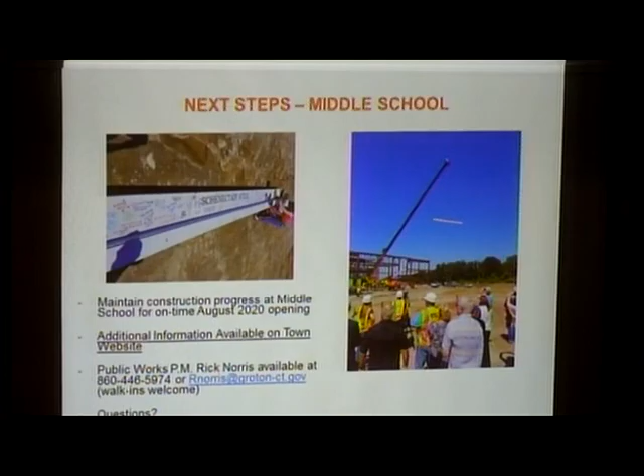Yeah, all district administrators were pulled in at the appropriate level. I don't remember the names of everyone the architects met with, but I know the request went out to the administration to provide the appropriate person, so I would trust that the superintendent's office did just that.

So you're going to have the fields up there. It would have been requested that maybe some piping be run out from the school up to where the soccer field and softball fields are, so that if in the future they wanted to put lights up, the pipe would already be there. Is that possible? We looked at that request, and it would be considered a piece of the project that was not eligible for reimbursement.

But on the flip side, we have power being run to supply the construction trailers that comes down that property line, and it's an option that power line that's quote-unquote temporary could turn out to be a permanent source of power independent of the school, so that it would have its own meter and be able to be monitored directly as a recreational amenity rather than powering it through the school itself.

So we looked at that, and when the construction manager showed us their logistics plan as to where that trailer area was going to be set up, we realized that could be a resource that could be left in place for future use.

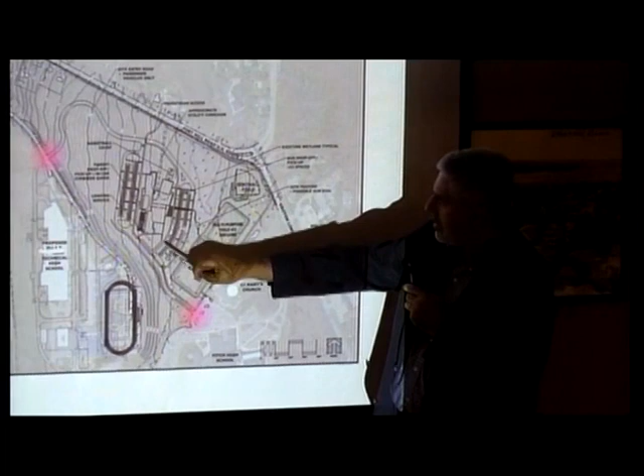Yes, we will use the existing Fitch driveway, and as we get near the service area for Fitch, at this end of the building, we'll reconfigure this parking area and have a drive that connects to the Fitch main drive, which then becomes the approach to the middle school. The buses will loop around this parking area, drop off at the curb, and then exit. So there will be some minor changes to that corner — it'll be safer.

Councilor Ortiz: One last question — how many students will attend the school? The capacity of the whole building? You're putting me to the test. Rick says 937. I was going to say 1,000, but thank you.

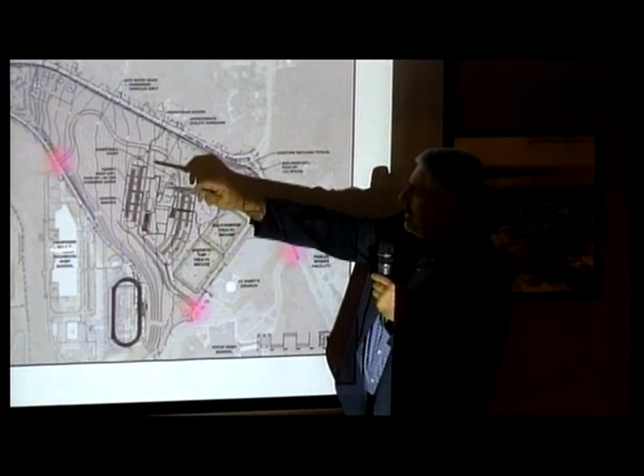Again, when we look at the total number of teaching spaces versus the enrollment, not all rooms that could potentially be used as homerooms are designated as such. I'm a former school administrator, so I know some tricks for increasing the student count per room and utilizing additional teaching spaces in different ways — you can provide surge capacity without adding to the building. On this particular building, because we have the embarrassment of riches of a large site, there is an opportunity to extend the academic wing to take care of excess capacity beyond that.

If I could add to that — one of the things we've had the architects do with all three of these schools, but this one especially, is make sure the teaching spaces are designed to flex for other uses. So you'll see rooms labeled movement studio that could be used for dance — we asked them to make spaces as multifunctional as possible, so there's no such thing as a dedicated history room or foreign language room. And as Jack said, we designed this school specifically so we can add to the wing at the end if needed in the future.